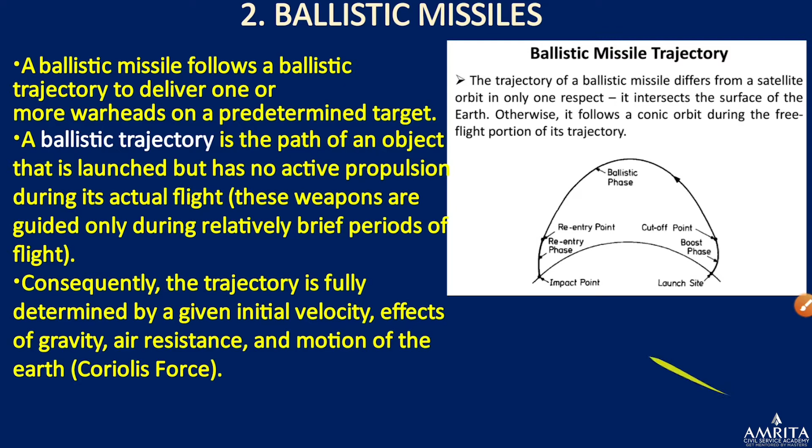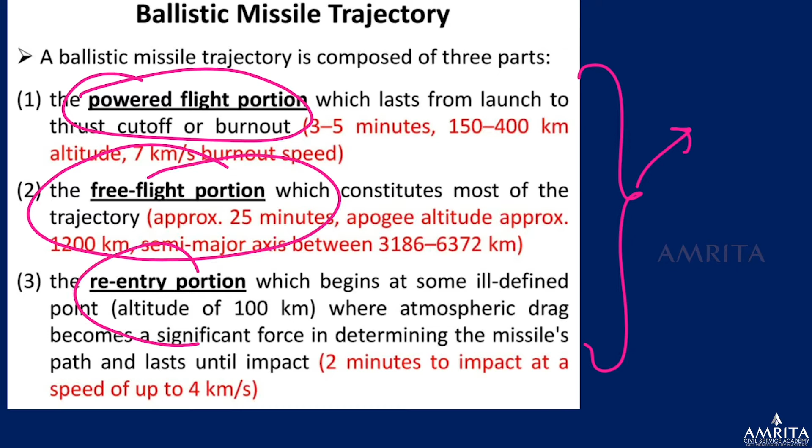So there is no active propulsion in this middle region. When it remains in the air, what are the forces acting? Obviously gravity. Apart from that, there will be air resistance, motion of the earth, Coriolis force. Only these natural forces will be acting. So it has three basic components: first, the powered flight, in which some velocity is given; next, the free flight portion; and finally the re-entry portion.

So, types of ballistic missiles. Tactical means very short range ballistic missiles, with range from 150 to 200. Then we'll have short range, then intermediate range, and finally the intercontinental ballistic missiles, more than 5,000 kilometers. This range is not fixed, I'm telling you. It depends upon the country, right?

So within the ballistic missiles, we have surface to surface missiles which go from one surface and attack the other surface. One is the surface to air missile, from the surface to some object if you want to strike some object in the air, right? And one will be the air to air missile, launched from air, from a particular launch system to another object in the air. So that is the air to air missile, right?

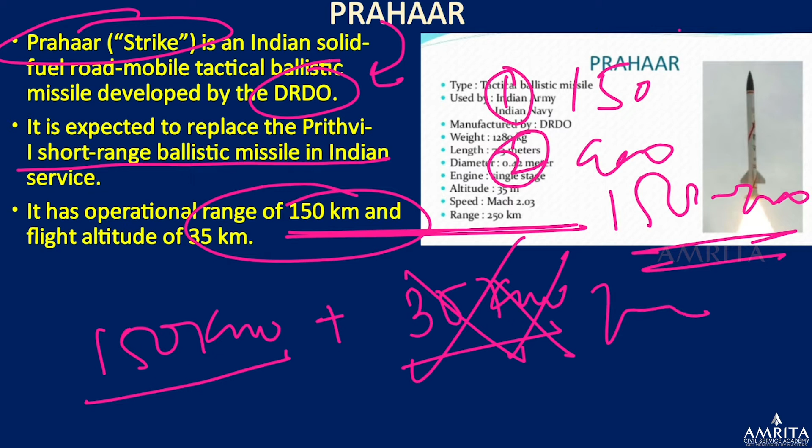Don't get too confused. UPSC will ask you a question and will definitely try to confuse you. They will give you 150, then the second option will be 400, then 1000. So you'll be able to very clearly mark it out. This can be 150, this can be 200, or they can give you the range itself, right? So don't be confused. Because we need to know the highest range, the capacity of the missile. That's it. We just need to have an idea of it.

Just remember the classification of the different missiles, where each actually lies. In the next video, we'll talk about the submarines, and there also I'll discuss the different classifications, and that is what you need to keep in mind. If you have the classification in mind, then there is no issue at all, right? It becomes really easy to cram these things, right?

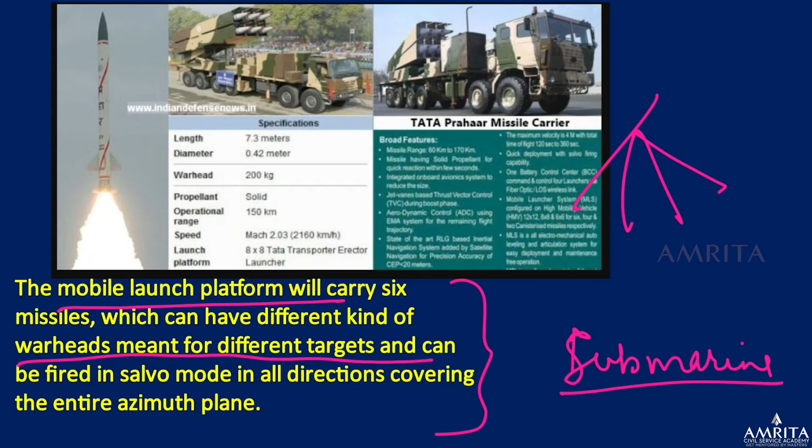So it will be very mobile, because a tactical missile has a mobile launch platform and different kinds of warheads for different targets, right? And it will be able to tackle almost all situations, right? Then we talk about Dhanush.

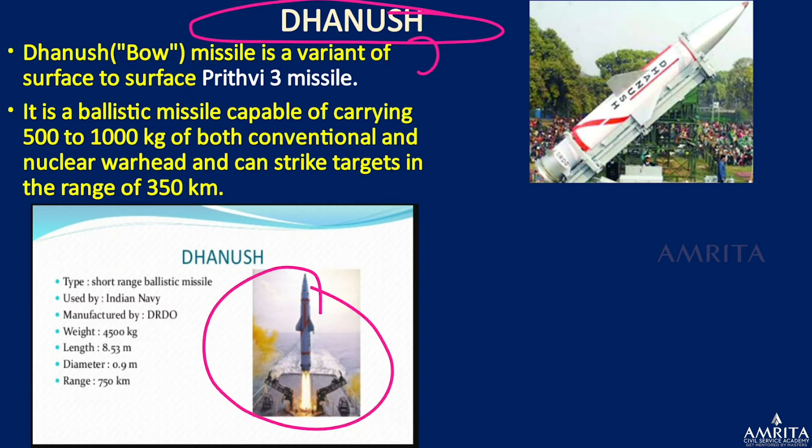Dhanush, as I discussed, is a naval variant of the Prithvi 3. So you can see here, it is launched from sea platforms. It's a short range ballistic missile of India developed by DRDO. The payload it can carry is from 500 to 1000 kg, and the strike range is 350 kilometers.

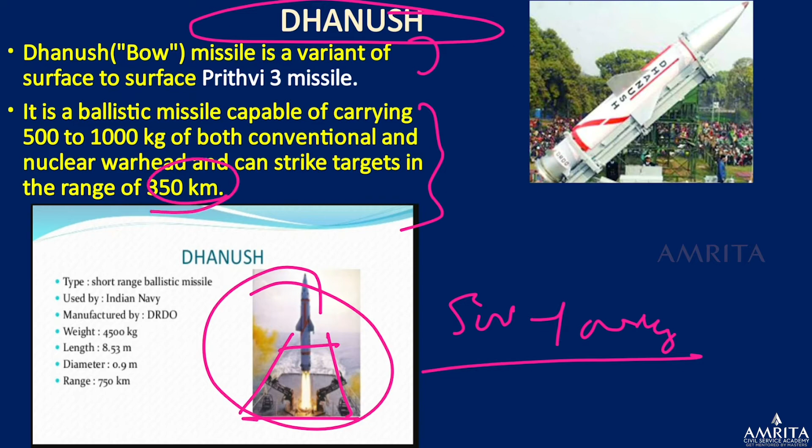It is named Dhanush. One important detail is that it is capable of being used as an anti-ship weapon and also for destroying land targets. Dhanush means bow and Prahar means attack. And attack, you can relate with the idea of tactical ballistic missiles.

Next is Shaurya. Shaurya has a 700 kilometer range. Again, it's a short range ballistic missile. Just remember where the classification lies. If they want you to arrange the range of Shaurya, Agni and all, remember that Shaurya was in the short range, so it will have a lesser range as compared to the Agnis. We will read that Agni 1 is also in the short range.

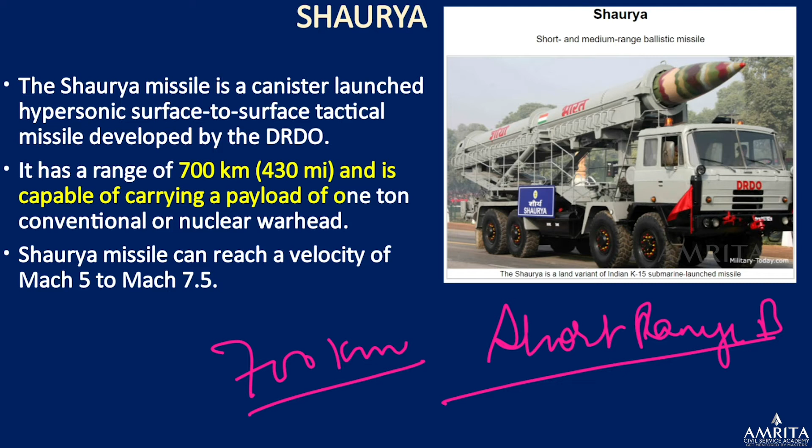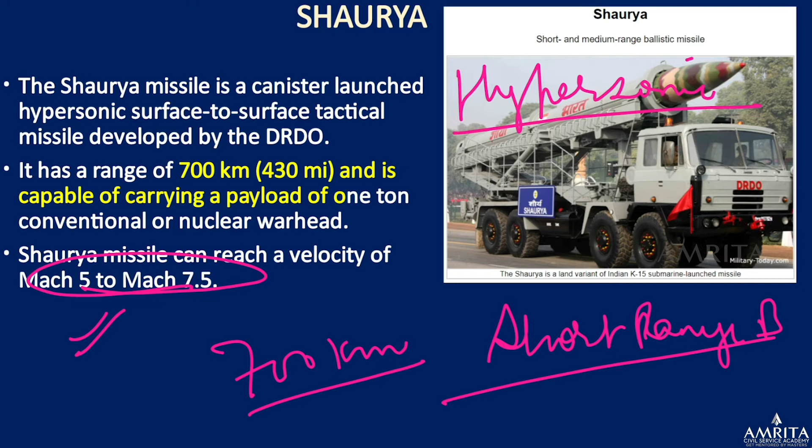It can reach velocities of 5 Mach and 7.5 Mach. That means it is hypersonic. So the Shaurya missile is capable of reaching this particular velocity. These are the ballistic missiles that we have discussed already. So this is a surface to surface missile, and it is a hypersonic missile.

Next, we're going to discuss Agni. Agni you need to know in relative aspects. For example, Agni 1 is a short range ballistic missile with a range of 700 to 900 kilometers. The payload of 1000 kg is for Agni 1, Agni 2 and Agni 4. Agni 3 you need to keep in mind is a deviant. Why? Because its payload is very high. In fact, its payload is more than Agni 5, at 2000 to 2500 kg.

You can see why Agni 3 comes before Agni 4, because the range is increasing. Agni 1 range is 700 to 900 kilometers. Agni 2's range is 2000 to 3000. Agni 3 is 3200. Agni 4 is 3500. Agni 5 is an intercontinental ballistic missile that goes 5000 kilometers. So they are arranged in terms of their range. However, with respect to payload, this is not the case. Agni 3 has a very high payload, 2000 to 2500 kg. So this is what you need to remember.

So we have discussed the surface to surface missiles. Now we'll discuss surface to air missiles, starting with the Trishul. How can you remember? Trishul is a trident, going from surface to air. You can imagine it like that. Trishul is a short range surface to air missile developed by DRDO as part of the Integrated Guided Missile Development Program. It is used against low flying attacking missiles.

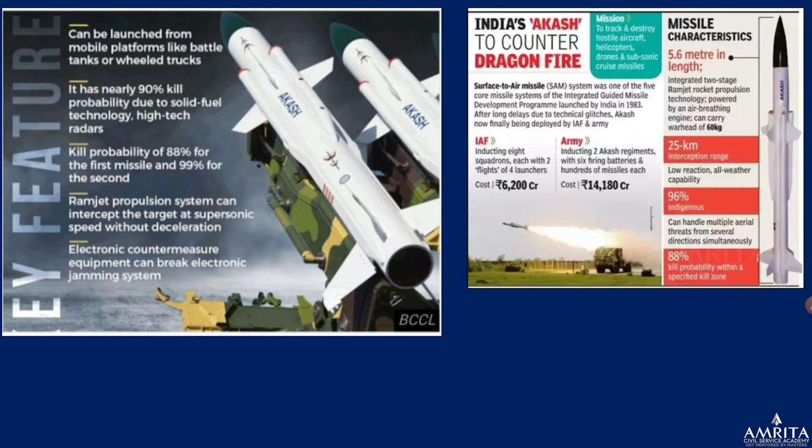So this is the Akash missile, and it can be launched from mobile platforms. It has a kill probability of nearly 90% due to solid fuel technology. Now we're going to read Maitri, that is, quick reaction surface to air missile. The range of the Maitri is 25 to 30 kilometers.

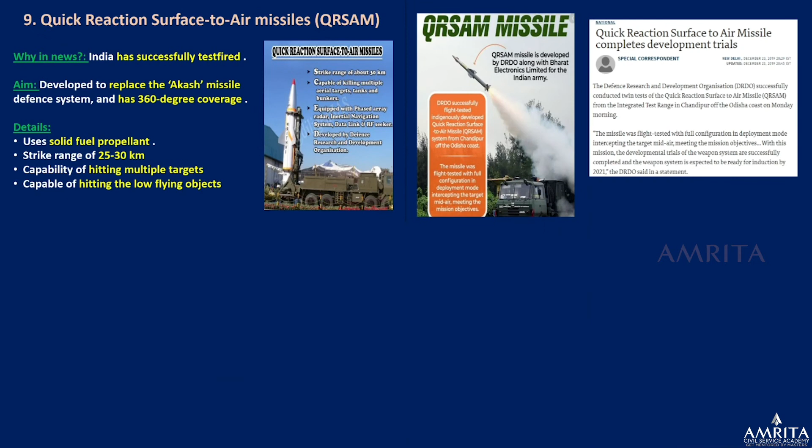Developed by DRDO in collaboration with Bharat Electronics Limited and Bharat Dynamics Limited, this missile is more effective against low flying aerial objects faced with the forward tactical battlefield area, and it will be able to tackle a new range, new set of missiles. We have discussed Maitri missiles earlier but the name Maitri was not mentioned then. This is the same missile. This is Maitri, a quick reaction surface to air missile.

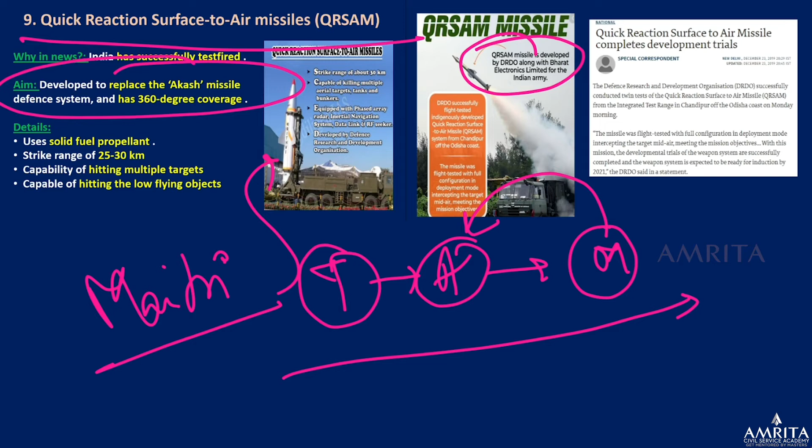It will be replacing the Akash missile. So first we had Trishul, then Akash, then Maitri. Maitri has replaced Akash, showing an increasing level of sophistication in the missiles being developed, along with Bharat Electronics Limited.

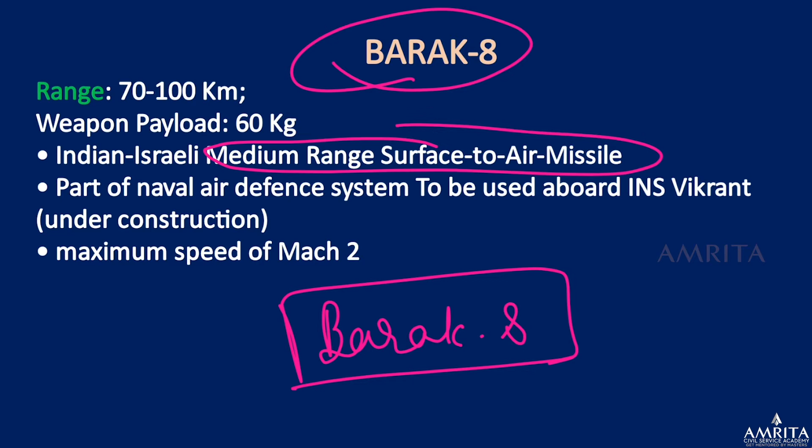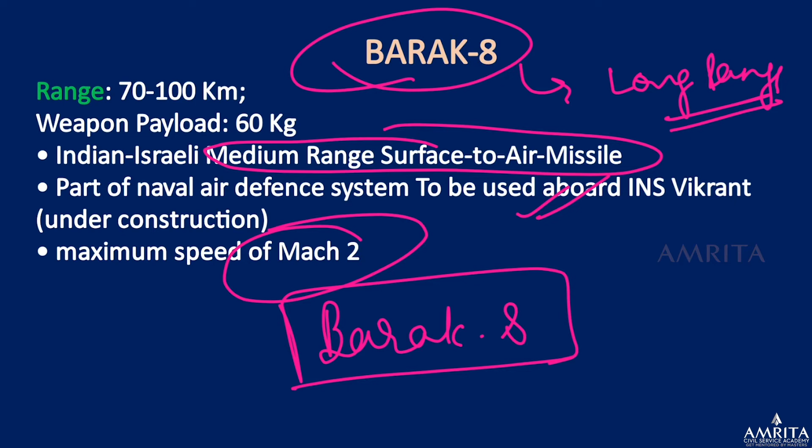Next is Barak 8, developed jointly by India and Israel. It's a medium range surface to air missile, and one of its variants is long range as well. It reaches a maximum speed of 2 Mach. It is part of the naval defense system to be used on INS Vikrant, which is currently under construction.

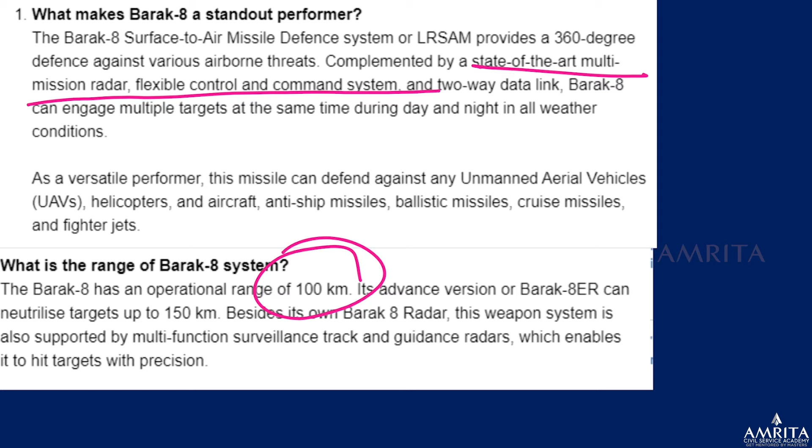Why is it a standout performer? It has a state-of-art multi-mission radar with a flexible control and command system. The operational range of Barak is 100 kilometers, but the long range Barak works with a range of 150 kilometers. So if a question is asked, remember the ranges of these missiles too - Barak 8, Barak short range, and long range.

This Barak missile is said to be strategically vital and a lethal weapon in the Indian missile arsenal. Next, recall we discussed Trishul, Akash, Maitri - the Maitri's naval variant is Revati and Maitri's air force variant is Rohini.

We have discussed Barak, and INS Vikrant is under construction - that's not covered here, I'll cover it elsewhere. So remember, Revati is the naval variant and Rohini is the air force variant.

Now we'll discuss the Astra missile. Astra is a Sanskrit or Hindi word meaning weapon. Remember it's an air to air missile, called a beyond visual range air to air missile. It is intended to engage aerial targets with high maneuverability and supersonic speeds. Developed indigenously by DRDO, it is the first ever beyond visual range air-to-air missile of India.

It has two modes, one of the deadly features being lock on before launch or lock on after launch - it has both features. It is very precise at different altitudes and can attack the desired target with very high precision. This is the Astra missile.

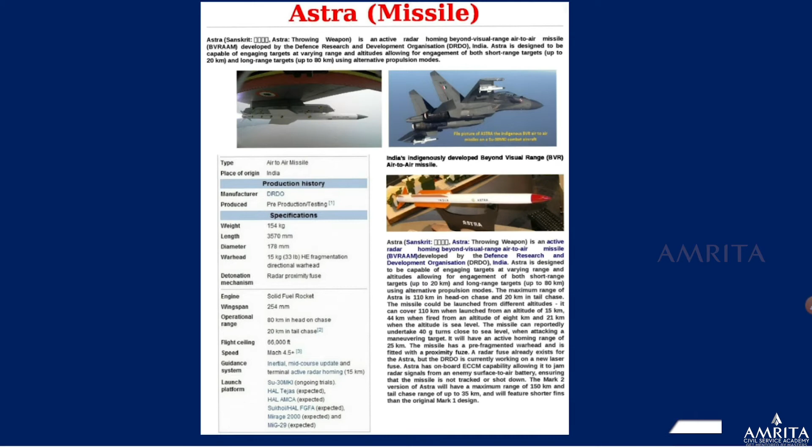Next is the submarine launched ballistic missile. To reiterate, we have seen short range ballistic missiles, then intermediate range which is the Agni series, then intercontinental also Agni series - these are surface to surface missiles. Then we have seen surface to air missiles, and air to air missiles.

With respect to surface to air missiles, that is Trishul, Akash, Maitri, Barak 8, and there are two versions of Maitri. Air to air is Astra. So this covers the ballistic missiles.

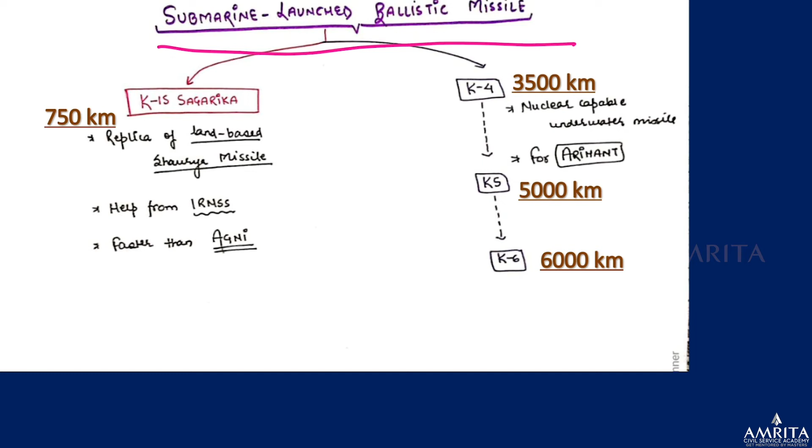Now some ballistic missiles are launched from submarines - the naval variant, you can say. First is the K-15 Sagarika range. Basically these are called K series missiles. First K-15 Sagarika missiles, then K4 is developed, and K5 and K6 are under development. K4 will be on the Arihant submarine. Arihant is India's nuclear-powered nuclear submarine.

We will discuss in detail the submarines - Arihant, Chakra, Arighat - and the difference between different missiles: Chakra 1, Chakra 2, Chakra 3, then Arihant and Arighat. We will cover that in the next defense video this month. This is the Sagarika missile - they are the replica of the land-based Shaurya missile, which we have already seen.

750-kilometer range. So they are the replica of the land-based Shaurya missile launched from the submarine with the help of our Navik system, and they are faster than the Agni. Similarly, K4 will be a nuclear capable underwater missile which will be launched on the Arihant submarine.

Discussing Sagarika: its range is 750, similar to the Shaurya range. It belongs to the K missile family and forms a part of the nuclear triad. A nuclear triad means the nuclear missile can be launched from all platforms - air, navy, water, and land - that makes India a nuclear triad. It is the submarine-launched ballistic missile version of the land-based Shaurya missile.

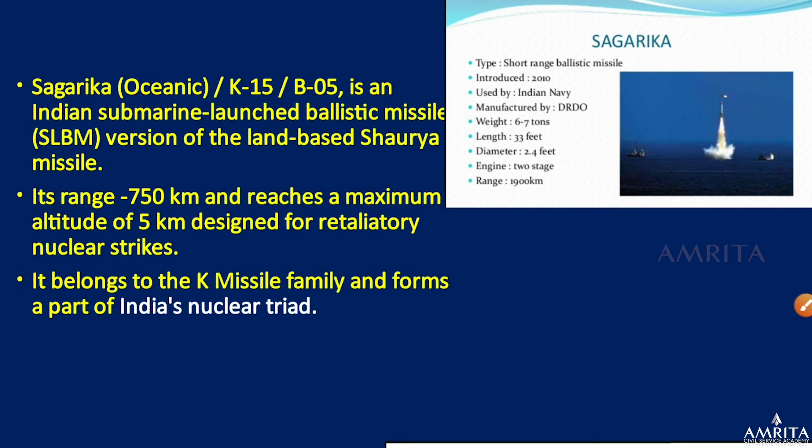So this is what we need to remember - it is included in the INS Arihant submarine. Next is the K4 missile, part of the K series. K4 is basically on a similar range, meant for the Arihant class submarine. It is said to be the submarine version of Agni 3, having more range than the K15 Sagarika. We have seen the diagram also - the operational range is around 3500 kilometers.

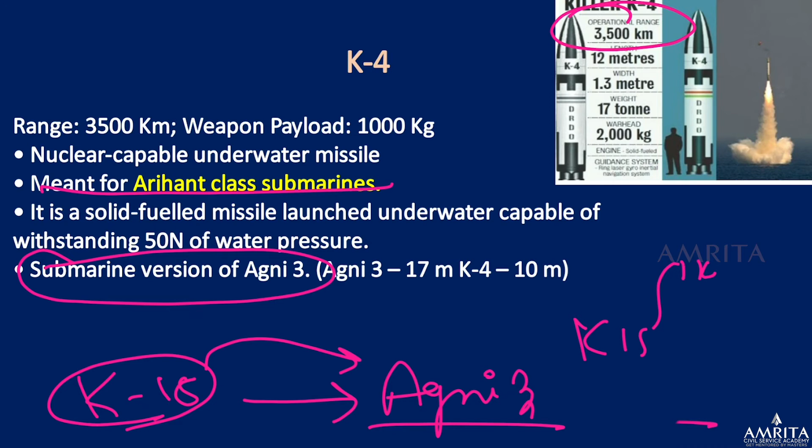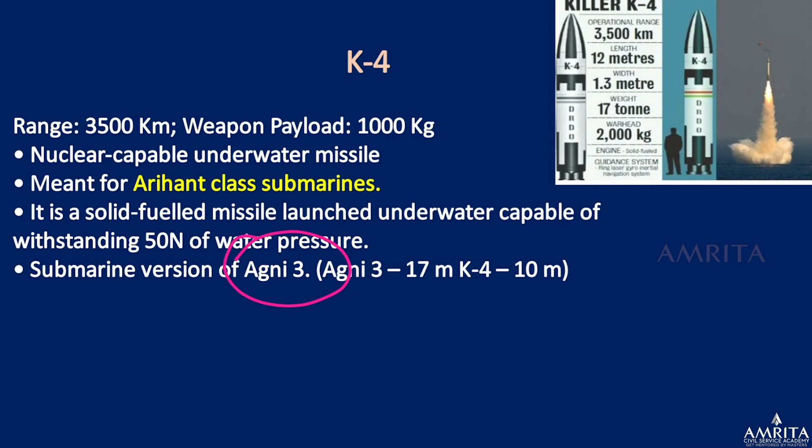You can see the progression from K15 to K4, then K5, then K6. This is all you need to know. Also, since it is similar to the Agni series, if you know the specifications of Agni, it becomes easy to remember. In September, India successfully test-fired the K4 submarine-launched nuclear capable missile, which shows the naval power of India.

Next we discuss - so we have finished our ballistic missiles. Just to reiterate, we have finished surface to surface, surface to air, then air to air, and we have discussed the submarine-launched ballistic missiles.

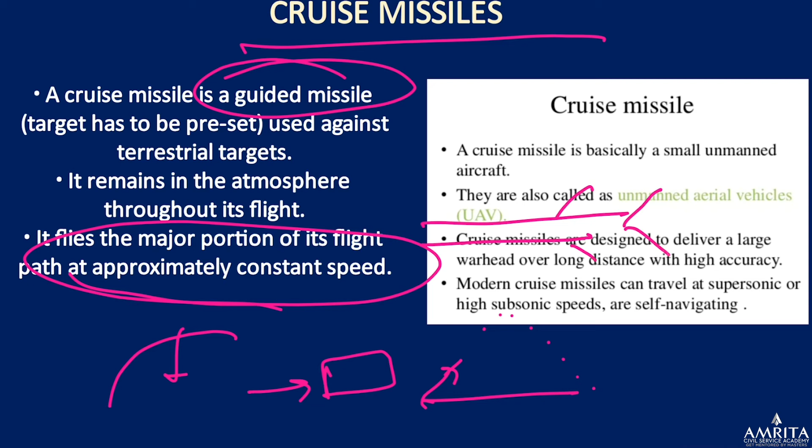Now we'll discuss cruise missiles. As compared to ballistic missiles which have a free flow under gravity, cruise missiles do not have a free flow - they are always guided and controlled, maintaining an almost constant speed. The missile is not left on its own; for a ballistic missile it's a fire-and-forget type - once fired it goes on its own trajectory. Whereas with cruise missiles, you can navigate it - go up, go down, and so on.

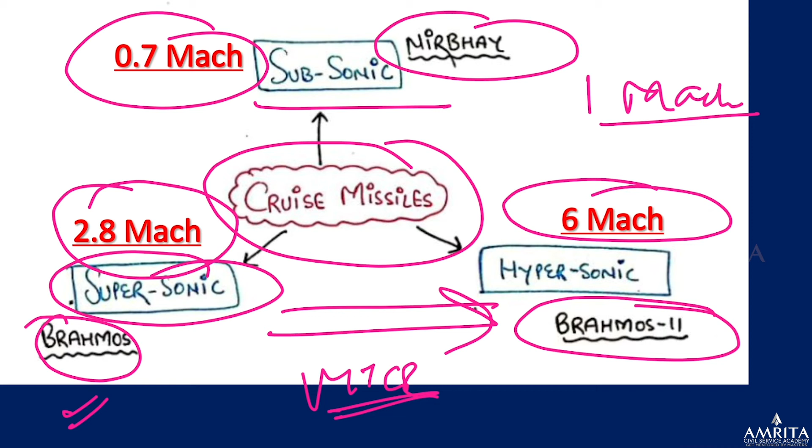In India, this is a very important component of our missile arsenal, and we basically have three kinds of cruise missiles. First is subsonic, with speed less than 1 Mach, the speed of sound - for example, 0.7 Mach - and the example is the Nirbhay missile. Supersonic is the BrahMos missile, which we have discussed previously, with a speed of 2.8 Mach. Now, after getting entry into MTCR, we are developing BrahMos 2, hypersonic with a speed of 6 Mach. So remember: Nirbhay, then BrahMos, then BrahMos 2.

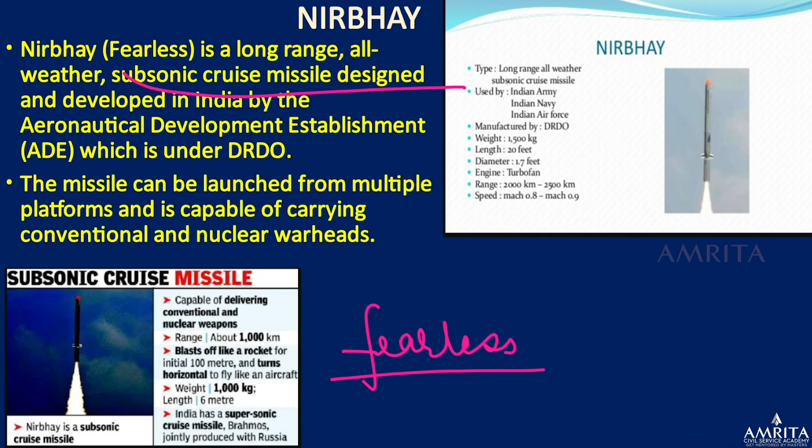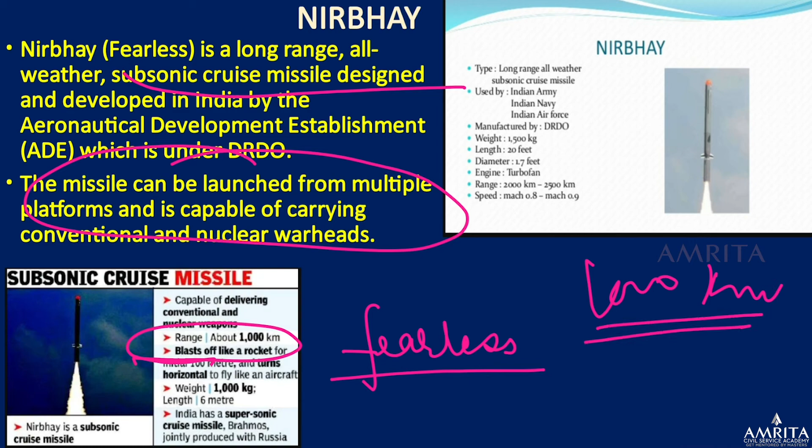First is the Nirbhay missile - Nirbhay in Hindi means fearless. It's a long-range, all-weather subsonic cruise missile developed by DRDO. It can be launched from multiple platforms and is capable of carrying conventional and nuclear warheads. Its range is around 1000 kilometers.

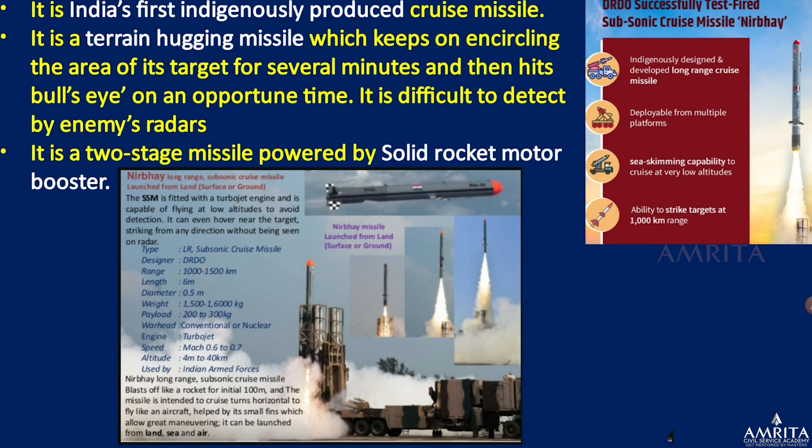After Nirbhay, we developed the BrahMos missile, which we discussed in detail last time. BrahMos is named from the rivers Moskva and Brahmaputra of India, developed in partnership with Russia. Next is BrahMos 2, which will have longer range and higher speed. So these are the three cruise missiles of India.

Now we discuss anti-tank guided missiles, starting with Spice, from Spice 2000. So basically these are Israeli guided bombs for the Air Force.

Next is Spike, which we will see today. Then Milan - we will not see Milan itself, but the upgraded version, that is the man portable anti-tank guided missile, which is replacing the Milan missiles. Next is Nag, with 2 variants - we will see the names Namica and Helina. So these are the 4 different anti-tank guided missiles.

First is the Spice 2000 bomb. It's factual in nature, but my idea is to give you the structure so you're able to classify all the missiles in one go. This Israeli guided bomb was used in the Balakot airstrike by India. Now India has also placed further orders with Israel, for attacking Jaish-e-Mohammed in Khyber Pakhtunkhwa.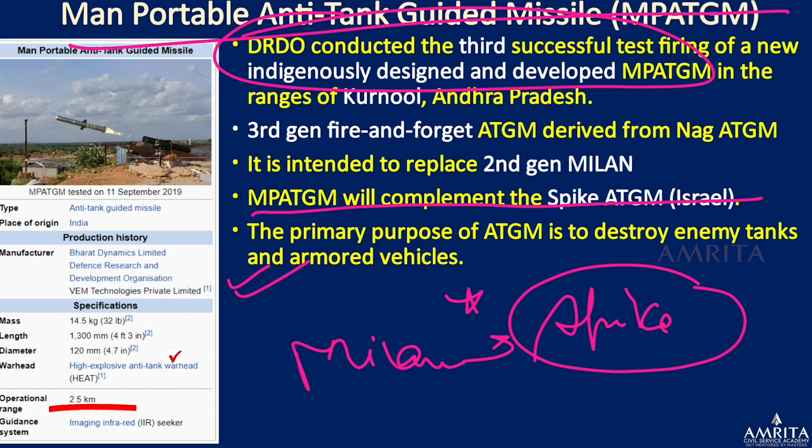Next is the Spice bomb - this is an anti-tank missile. Next is Milan, so replacing Milan is the man portable anti-tank guided missile. It was in the news because DRDO conducted successful testing of this missile. It will be replacing the second generation Milan and will complement the Spike missiles, which we've seen in our last discussion. The primary objective of this anti-tank guided missile is to destroy enemy tanks and armored vehicles.

Coming to Nag - it's India's 3rd generation, all-weather, fire and forget anti-tank missile. Its variants include a land variant, and the helicopter-launched Nag, called HELINA. Then there's NAMICA, the Nag missile carrier tank buster. So remember, Nag is the main missile, and NAMICA and HELINA are its variants. Nag is a lock-on-before-launch missile, locking the target before release. These details you don't have to remember, just that it's an anti-tank guided missile, and that's it.

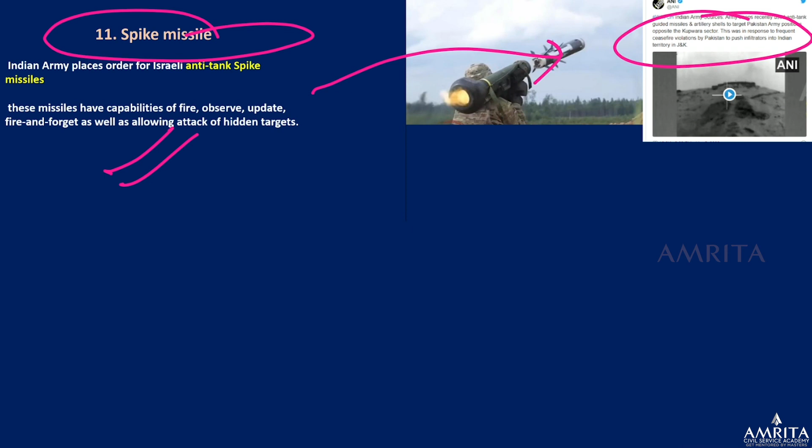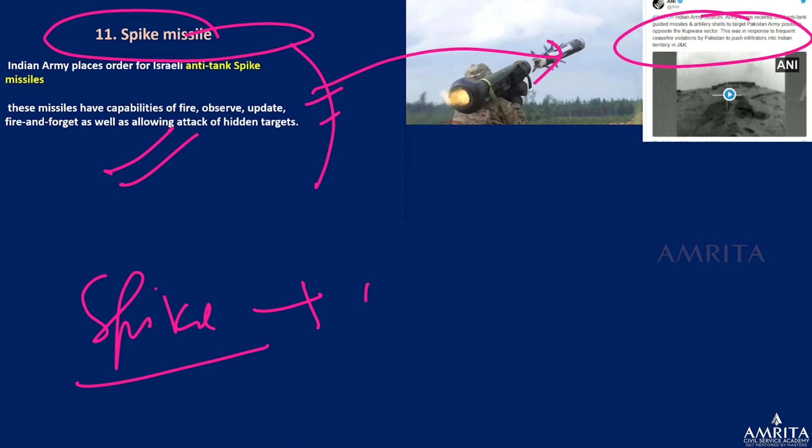Coming to the Spike missile, which we have already discussed - Indian Army has used this Spike missile against Pakistan. That's why I've kept this part small. Anti-tank Spike missiles used in collaboration with Milan missiles, now replaced by the upgraded anti-tank missiles of Milan. So these are the anti-tank guided missiles.

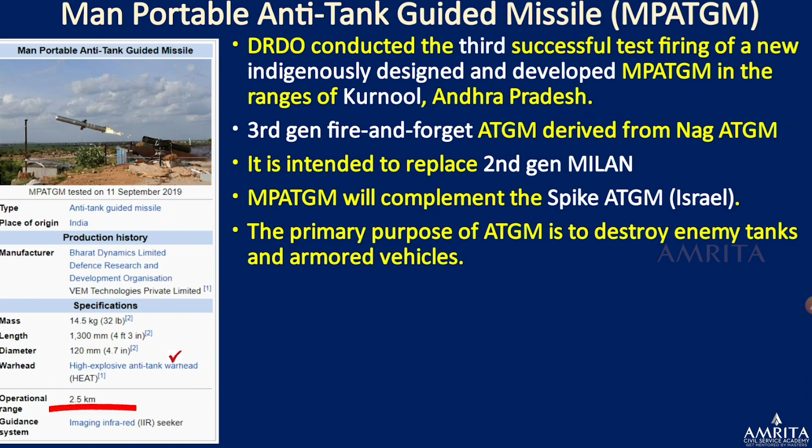So that is how we end our discussion. I know it's a very factual discussion, but to be honest, we have discussed the classification in this session rather than just the content. We've read about many missiles - this was the man portable anti-tank guided missile. Just to reiterate, going back to the start, this is the anti-tank guided missile category.

So just to revise - Spice 2000, the Israeli guided bomb for the IAF; then Spike missiles from Israel; then Milan missile upgraded to the man portable anti-tank guided missile; then Nag with 2 variants, NAMICA and HELINA. Apart from that, we have seen the cruise missiles - Nirbhay, BrahMos and BrahMos 2. Before that, we saw ballistic missiles and their different components.

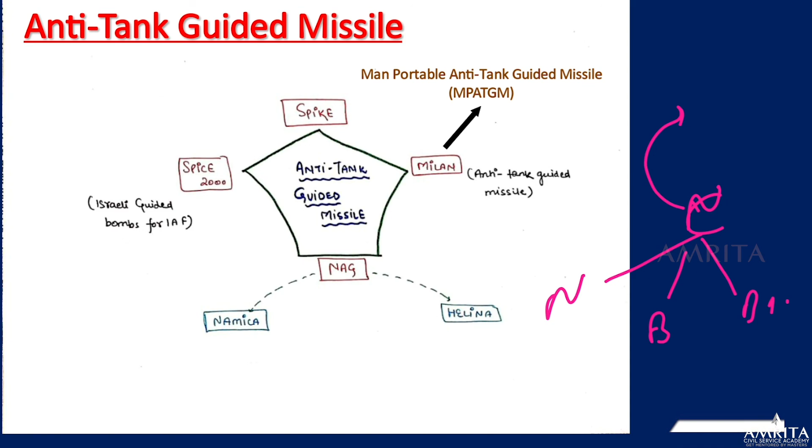With this, I've completed one of the sections of missiles that is very confusing for students - where does a particular missile lie, what is its classification, what specifically we have to remember about it. Because if a question on UPSC comes on these missiles, it will be really easy. A question could be on Spike missiles - options like ballistic missile, short range ballistic missile, or anti-tank guided missile. Very shallow level questions will be asked, not very tough ones. They can ask whether it's Israeli origin, Russian origin, or US origin - very easy questions, but they can be asked. This is how you have to remember the missiles in this classification format.

So with this we finish our defense section on missiles - many of the missiles I've discussed in this particular session. In the next defense class, I'll discuss some of the events of the September month. See you in the next class. Thank you everyone.